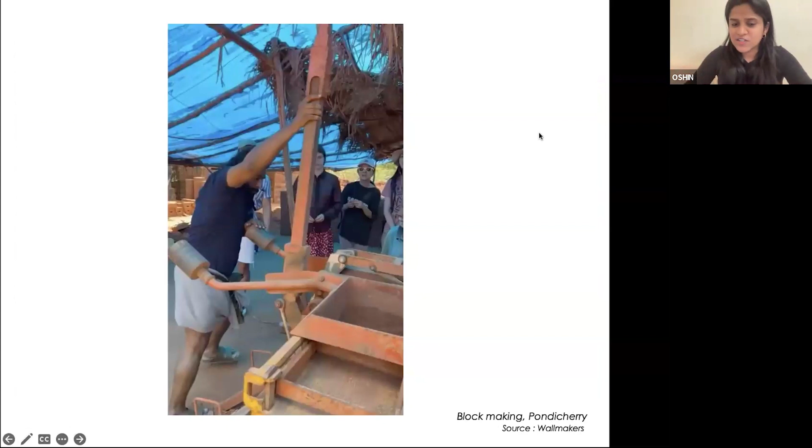So now I'll go back to the journey of Wallmakers, which started in 2004 by architect Vinu Daniel, who is the principal architect. The journey started from Auroville Earth Institute, which is in Pondicherry.

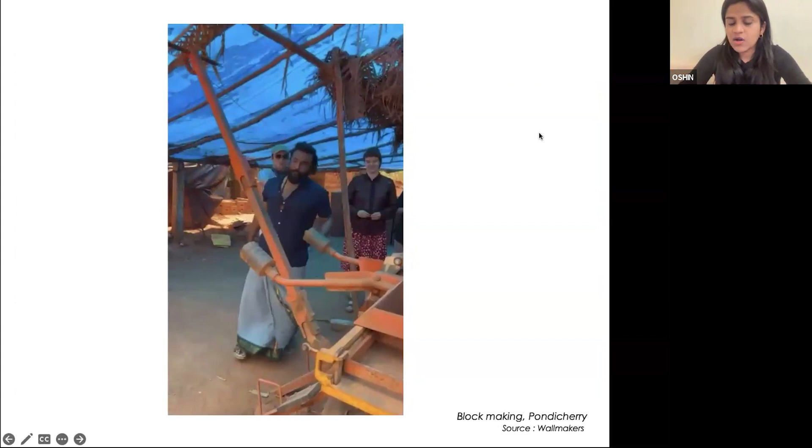What you're seeing here is an Auram press machine, which helps us take the soil excavated from a site and compress it. Then, with 6% cement added, the soil from the site itself is used to form these blocks, which are used to make buildings.

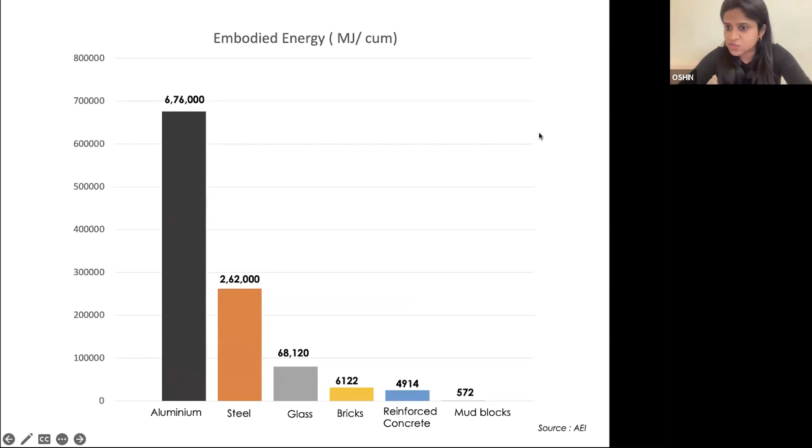This material is great. The embodied energy in comparison to aluminum comes around to 676,000, and steel 262,000 megajoules per meter cube, compared to our mud blocks, the bottommost one you see, which is just 572 megajoules per meter cube. In terms of carbon emissions also, compared to aluminum at 71,344, our mud blocks stand at 54 kilograms of CO2 per meter cube of construction, which is very minimal.

The journey basically started with using these mud blocks. This is the St. George Church in Mattancherry that was built, where we used the Nubian technique of construction - without any shuttering, using the same CSEB, compressed stabilized earth blocks, the entire church is made with a series of vaults and domes with just 4 lengths of steel. If you zoom in enough, you can see there are 4 beams connecting. Other than that, there is no reinforcement in this project or shuttering being used.

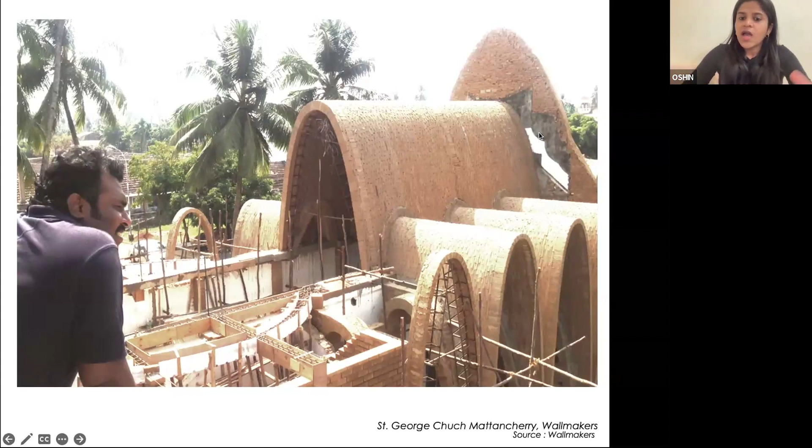This is finally the kind of form we were able to achieve, with the entire construction made using CSEB blocks. There's a Tadao Ando-inspired cross of light also inside, which adds to the ambience. We actually did quite a few projects with CSEB, and fast forward to 2016, that's when the first roadblock hit, because this was a site for a teacher in a place called Pathanamthitta.

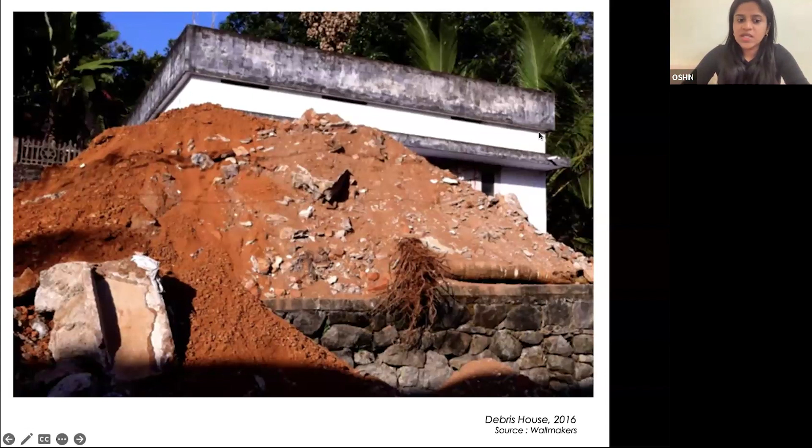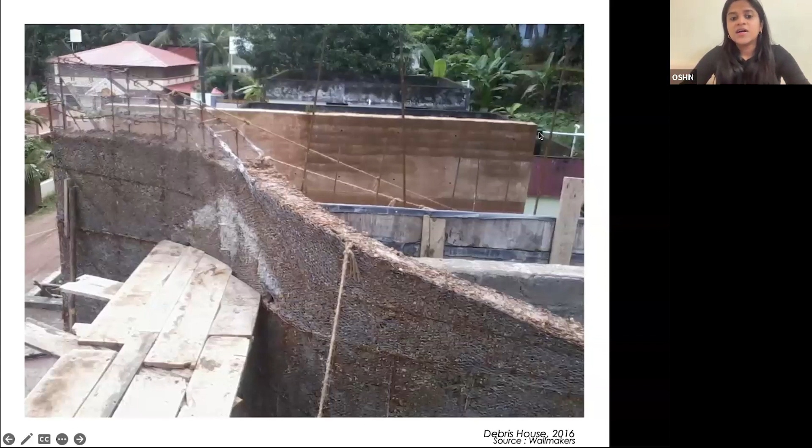This is the vision that beheld us when we visited the site, because the site had leftover debris soil, which was dumped by all the neighboring plots after they had finished their construction. So then the question came: when we have a small plot filled with these materials, do we just continue to build with the one material that we know to build with while dumping this material into somebody else's property, or is there something else that we can explore with this? So that is when the design kind of takes in, or the material kind of stretches to accommodate a new material into the palette of design.

You can see here behind that there is a rammed earth wall, which is normally what we used to build with. And in the center there is a wall that we tried with this debris wall, in which we had mesh, and we got this manually pulverized debris filled inside and then plastered. Here also you can see one half of it is still rammed earth. The left-hand side, what you're seeing is the debris wall, which is ultimately mud plastered. And we used waste meter boxes and other waste materials also, which we found over there.

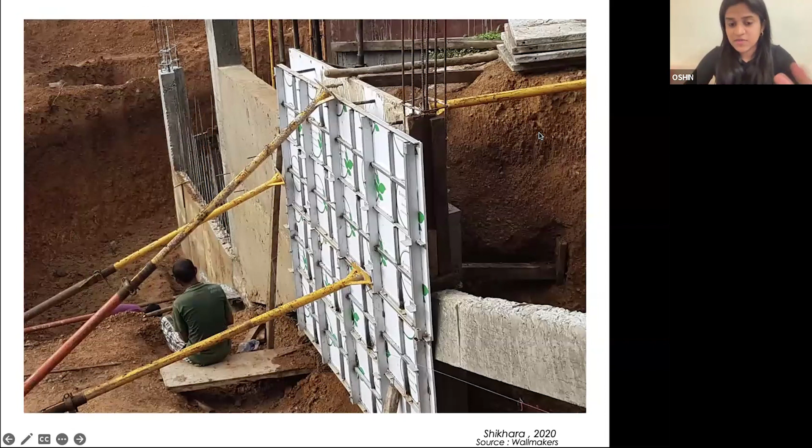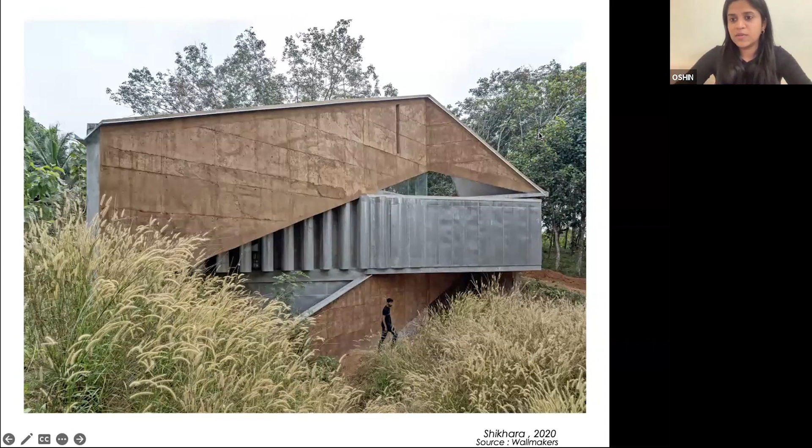Again, three years down the line, once we were really familiar with this material, we got this project called Shikhara, in which we decided to go for multi-storied construction with the same technique. But again, you can see that it is a composite structure, with columns and beams running, but we still managed to use the same technique to make a three-storied structure. And again, the finish also was starting to get a bit better, because our team of masons were also getting a better hang of it.

So the whole idea for us was: while the process of building is something that disrupts whatever ecology is there in a site, how can we work on our design in such a way that it tries maximum not to disrupt the ecology of a site, especially in an eco-sensitive area such as hills and things.

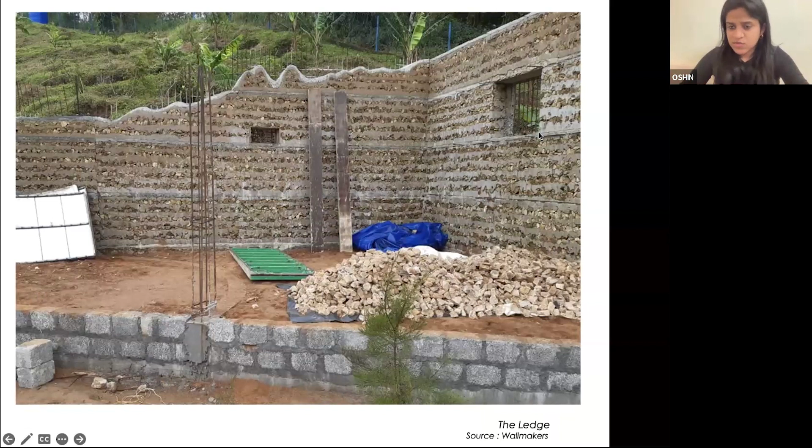And you can see that the final result is that we could actually achieve 2 stories of walls using this new technique that we had developed here on site.

And interestingly, in this area, the main cash crop that is grown there, which people use only for temporary construction, is something called casuarina, kind of similar to bamboo. So we actually thought of treating these casuarinas and then using it.

So this is the ledge that we had on site, and if the building could actually be half immersed into the landscape that there is already, without touching it in any sense, and just allow for a small protrusion to happen, through which the trees that are there could cut in, the vegetation could eventually grow.

And you can see that finally, we wanted the casuarina to really merge so that the building is not even visible 10 meters away - you cannot see it. But at the same time, the person inside has the beautiful views to look at.

So that is when this idea of camouflage architecture came into the picture, which is how do we really make buildings which could be quite big, but ensure that the building can do minimal damage to the ecology it comes in - something that conventionally people are not able to solve with buildings.

So you can see here the view to the valley is from the building, but the building is pretty much, especially on a foggy day, invisible. And the roof is meant for the vegetation and landscape to eventually take over so that it becomes part of the landscape - the building does not stand out like a building anymore.

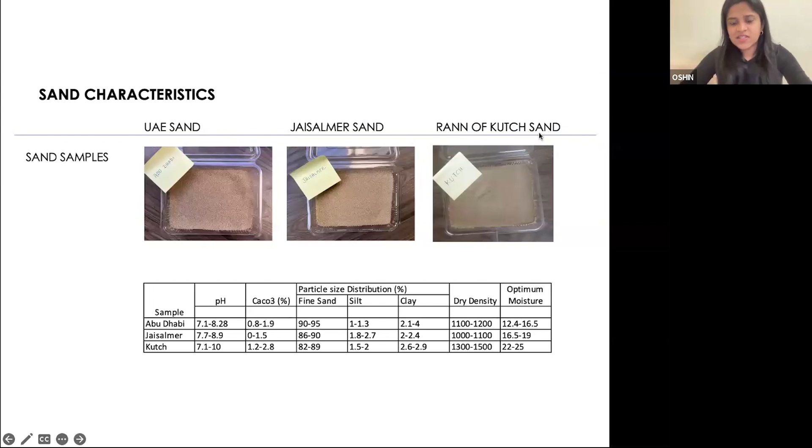And like always, we took the sand samples from the site, and as expected, the clay content was not enough, which meant we would not be able to do our usual mud blocks, which is why we were looking at other options.

That is when this technique, which was introduced way early in the 90s by Michael Reynolds, called the tire technique - when you ram the tire with unstabilized soil, you can use it for construction.

And again, this particular area, the GCC countries, is a place with a lot of tires being wasted. If you look at the numbers, it's really scary - more than 6 lakh tires are being produced on a daily basis.

And then we had this idea to make a pavilion that would use at least 1,400 tires, which is the number of tires that is wasted in 3 minutes around the world.

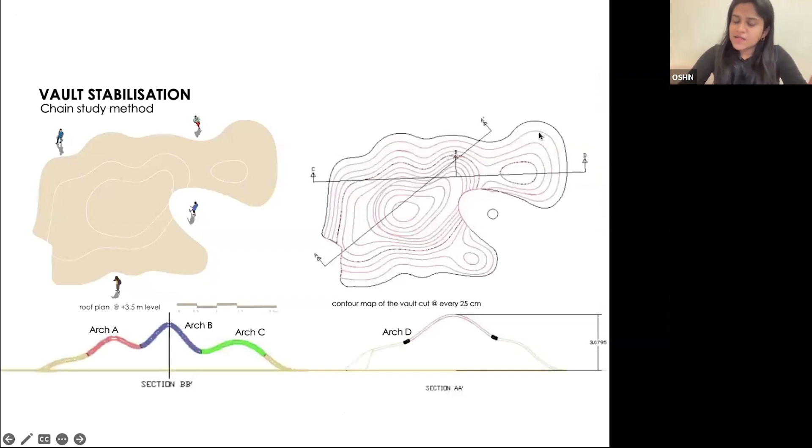So we wanted to do a contemporary version of the same.

The idea was for the tires to actually project out, become a vault, and ultimately connect to be the pavilion structure. The advantage here is that we did not have to use any cement inside the tires, because the tire would be like a holding matrix, and we could use the desert soil—normally not suitable for construction—without stabilizing it.

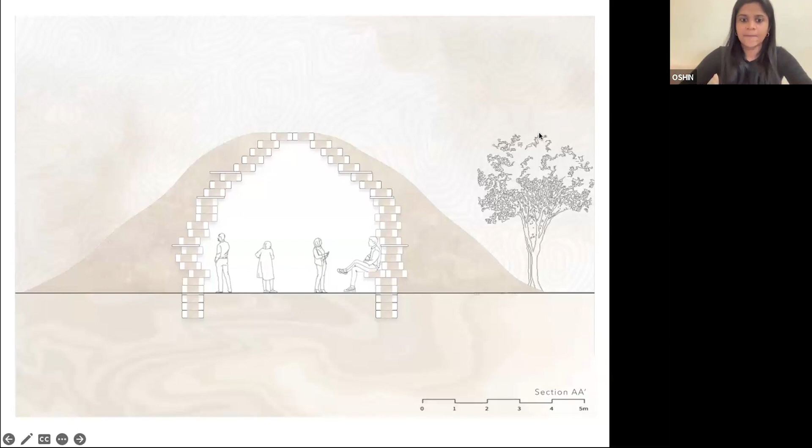The work started. You can see architect Vinu with our mason. The timeline was really strict—we had to finish the entire pavilion in 50 days, which seemed like a monumental task, and with a new team of Pakistani workers whom we had never worked with before, it involved teaching them what it was.

You can see the walls coming up. This is day 20 into the work. The pace was pretty much slower than what we were expecting. Each of the tires had to be supported, because only when the entire tire connection happens can we take down the supports that are there.

You can see that the building is slowly shaping up, the tires projecting slowly out. That is when we hit the next roadblock, because we were into day 42, and with a team of people we had never worked with before, we could understand that the plastering and all of these works were kind of getting short.

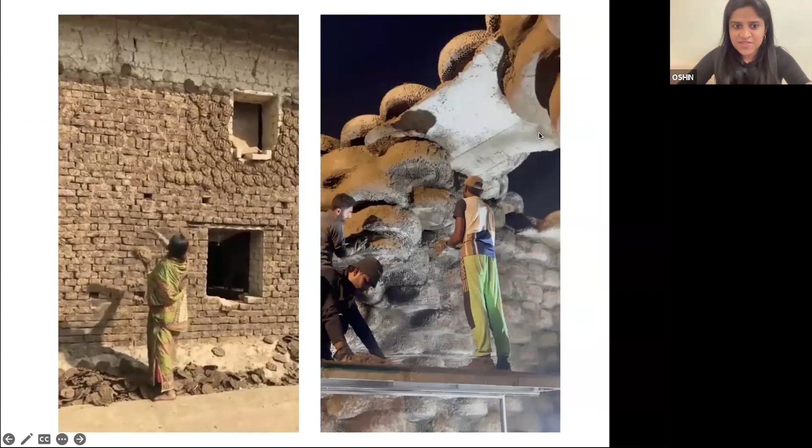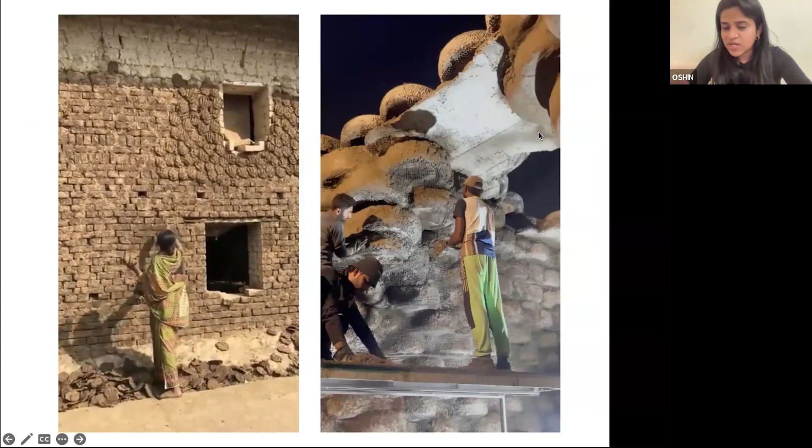So that is when we had to intervene into the process to make sure we could modify it to simplify it for people to do. We showed our workers something we had seen on Instagram and YouTube long ago—a lady throwing, with precise aim, cow dung mortar onto the walls. We showed the same thing to our workers and motivated them to do this for us in 3 days.

Finally, to merge the building with the context and also add to the cooling factor, we put 20 tons of desert sand onto the sides, on both sides. And this is the final pavilion that you're looking at.

When we measured, we could actually see there was a 12-degree difference between outside on peak afternoons, when outside was burning at 38-39 degrees centigrade, and inside. We could reduce the inside temperature by 12 degrees with this technique of unstabilized earth and tire masonry. This is the first structure of its kind to bring about that kind of temperature difference, which was a dream come true for us.

The entire structure is also meant to camouflage with the surroundings so that it looks like a small passage. When you're inside, you see the tires, the tire dome, and feel part of it. This is again our team—architect Vinu, Presha, Rakshita—our entire team with which we worked day in and day out for 50 days to make this monumental pavilion happen.

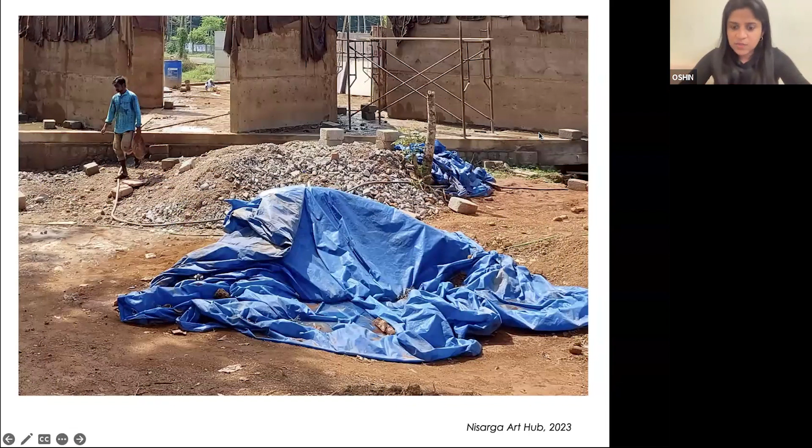Naturally, we again found a lot of debris in that area, because it's in an urban city location overlooking a field. By now we had also received a patent after 7 long years for our shutter debris wall technique, so we were ready to push it to the next level, because it's got a very good compressive strength of 4.5 MPa.

What if we actually do the entire structure without any columns, so that the entire walls are load bearing in nature? When we studied the roof which was culturally used previously, we saw that the slope of the roof, generally 33 degrees, is very similar to the slope of an open air amphitheater.

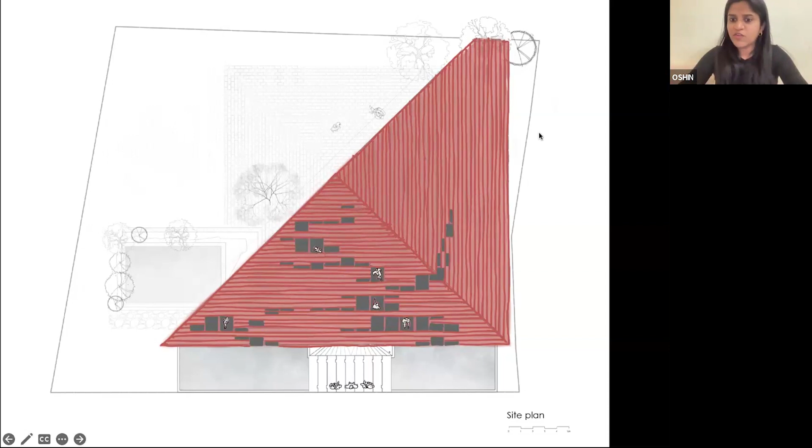Since the site didn't have a lot of space, we were thinking, what if we could do small cutouts in the roof, which would become skylights for that open space below. But it could also double up as a seating area for informal music sessions, so it can happen in the same space.

The work started - you can see our shutter debris walls happening. That is when one more challenge came into our process, brought in by the clients, because as they saw part of the work, they were asking if they could include an extra studio space to do a small recording and everything.

You can imagine it's a 2,500 square feet project. We had already fit in maximum whatever we could, and we were perplexed as to how to include this space. That is when we again tried to think, because by then you can see our shutter debris wall construction happening, in which we set the shutters.

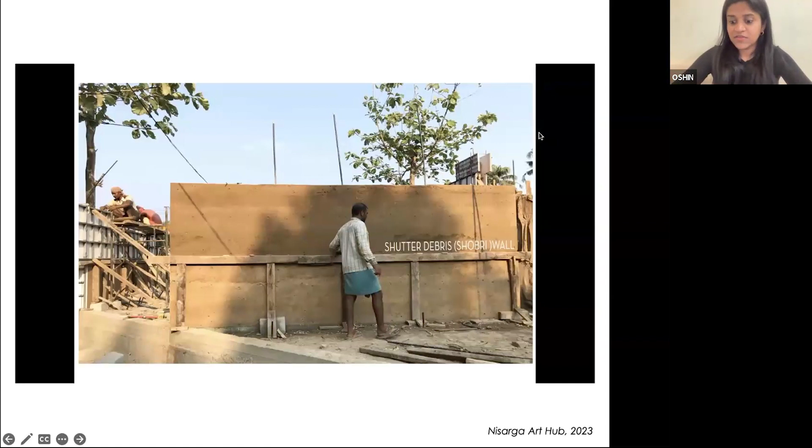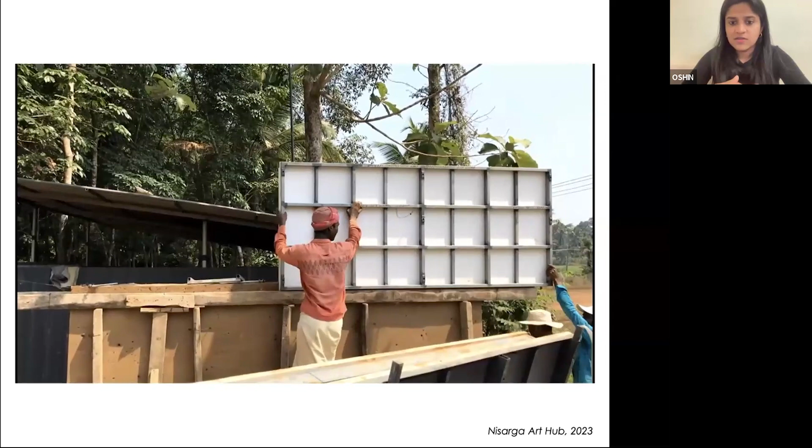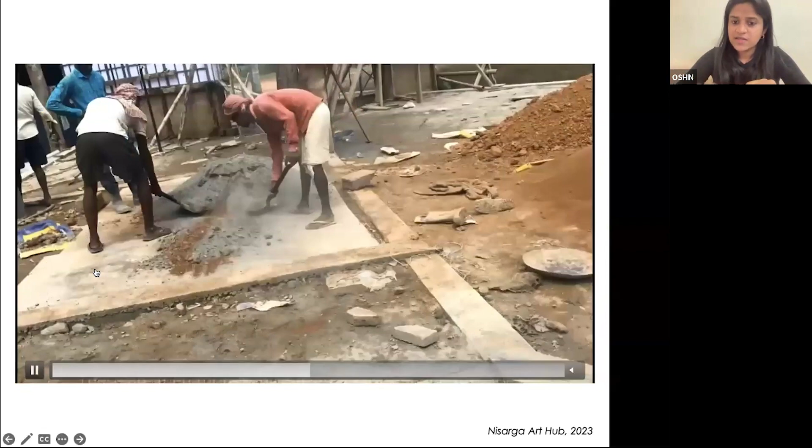You can also see that the finish of the walls is way better compared to before. The workers had also gotten really good at the process. You can see that the soil goes in, then 6% cement is added, then the debris is added in parts and uniformly mixed.

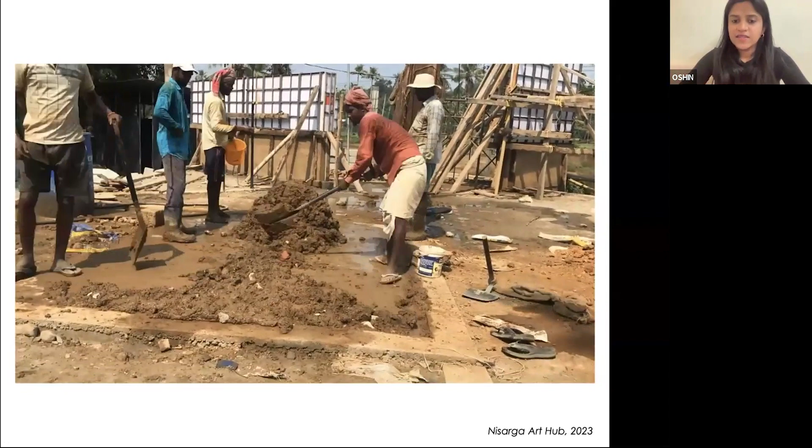Water is added in a required proportion depending on the soil type, and then it is poured into the shutter and correctly compacted, and after a day it is removed.

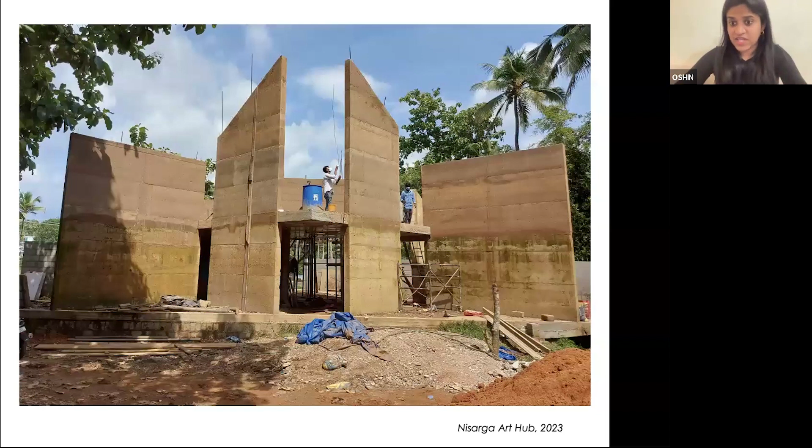This was our technique, and we were very happy with how the walls were shaping up, that we decided to push it one more step. We thought, what if we can add a cantilevered slab studio space above the living room, so that the studio can be supported on the walls and they can still get their sealed recording studio.

You can see our structural engineer and architect Daniel and myself all having intense discussions on site as to how we can do this, because this decision came in between the construction.

You can see this particular wall, which has a debris wall foundation also, and the wall shown in orange. We had a 3-meter cantilevered studio to one side.

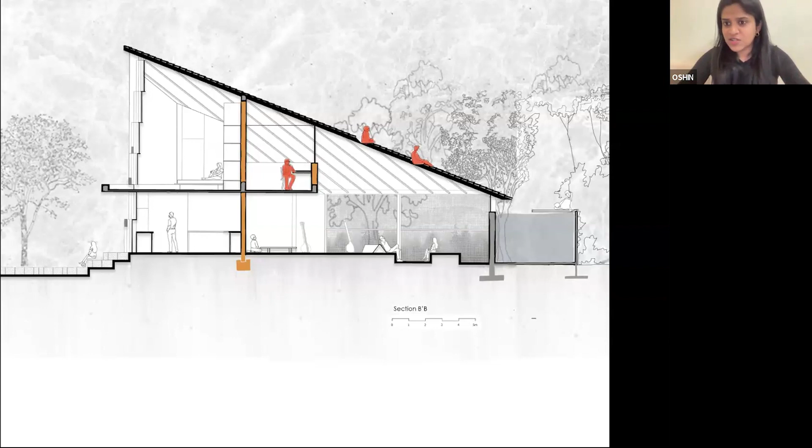Added to that, the extra weight of all the people, like 60 people sitting on the roof, would also be partially taken by these walls.

Culturally, the clients themselves were somebody who really advocated the importance of the Padmasana or lotus position, where sitting on the floor and eating actually helps in your digestion and general health.

So we didn't have much furniture, and the furniture was incorporated in such a way that people would mostly be sitting on the floor informally, and even the guests would be part of it. So this is the living room seating and everything.

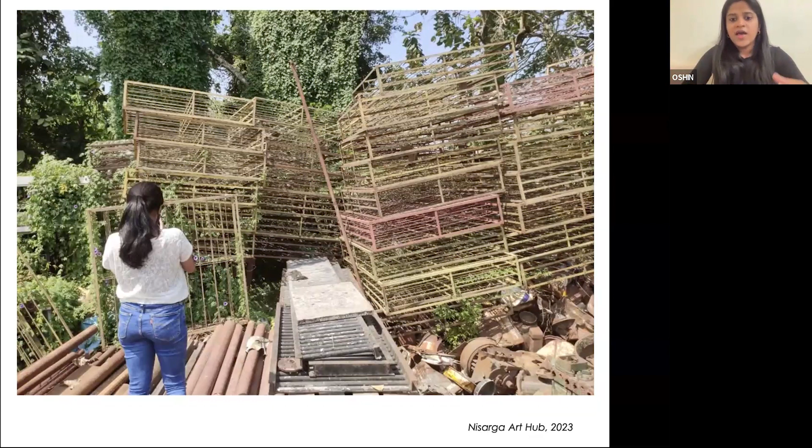During construction, there's no shortage of waste. We found discarded racks at a nearby scrapyard along with a lot of other waste materials. Because we found this in huge quantities, we got the idea of covering the west side openings with this grill, which could also allow plants to grow. That became a wonderful addition to the elevation of the building.

Another material we found while working closely on the project is something called jute rolls, a very cheap local material. Once we found it could be stretched really hard and put on the roof, it became a translucent screen through which the skylights could give light. At the same time, it became a wonderful false ceiling option for the roof.